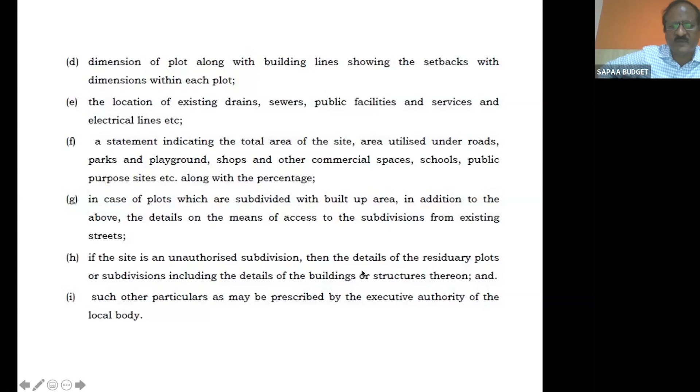And then another important thing is inspection. Inspection is, they will normally come for the foundation stage, after the foundation stage, you should call for inspection. They will come and see that there should not be any violation in the setbacks. When you leave the setbacks in the approval plan, there should not be any violations. If they come and see a violation, then you will not be allowed to proceed further.

So after completion of the plinth stage, they'll come. Then after the completion of the first floor, second floor, or after completion of the building, they'll come. But this is not for G+3 units. If you have only 3 units, or for an individual house, they will not come. But if it's more, where the completion certificate is required, inspection is a must. They'll have to come and see this thing.

That's why tomorrow when the building is stopped by the authority, the client will blame you. The client will tell you, sir, you have not guided me right. He will simply say that's what the CMDA member secretary also says. The client says, sir, I trusted the architect, I gave the full responsibility to him. I don't know the rules and the regulations. He has only advised me.

So if anything goes wrong, they will simply wash their hands off. We will be at the mercy of the law authorities. So you should not only be an expert in the rules, you should also tell the client or the contractor.

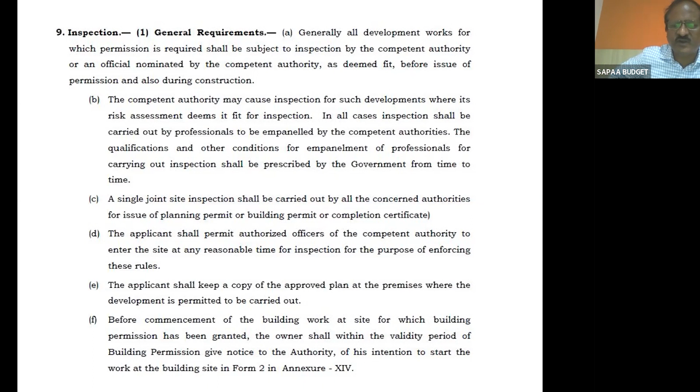But all these things will lead to problems. You have to put your foot down and say firmly, no, I cannot sign this, you cannot go as per approved actually. The architects have to be really careful about this during the progress of construction.

This is the plinth story stage. They will come, and at the last story they will come for the inspection.

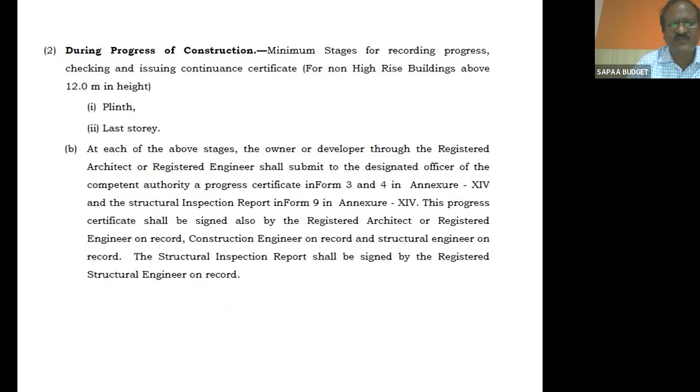That's it. Now demolition. If there's any building existing on the site, then you'll have to make a demolition plan. Sometimes the old building will be demolished and the new building will be constructed. The old building has to be demolished. You have to make a demolition plan, approve it, make an application to the corporation, and pay the demolition fees.

The corporation will take an undertaking from the architect, from the owner, saying that during demolition they have to be careful. They should not disturb the other buildings. They'll take an undertaking because during demolition, the building might fall on the neighbor's house. While digging in the old building, the neighbor's house might get damaged.

So they will take an undertaking from the architect or the owner, saying that there will be minimum disturbance for the neighbor building. If anything happens to the neighbor buildings, he will alter it at his own cost. Only after giving the undertaking deed can you apply. You can put the demolition plan plus the approval plan in the same drawing. Demolition drawing plus approval drawing also. You can get it done. All these things can be done by you.

But demolition means what is the extent of the area, like how many floors the building has, what building it is, RCC roof or Madras terrace roof. For all these things we have to attach the photographs. And then here, the latest advantage is the trust and verify method.

Now, our MS CMDA, with a lot of experience, said that we will trust the architects. We will trust. The moment you apply for planning permission, we will give approval. That's what the MS, Mr. Anshul Mishra IAS, told recently. Trust and verify method. We trust the architects.

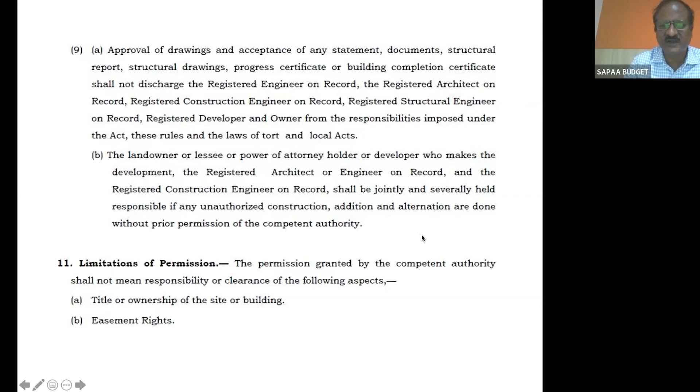But tomorrow when they come for a surprise inspection, if there's anything wrong in what you certified, then you'll be held responsible. So the biggest responsibility is entrusted on the young architects, and we have to do justice to that. Whatever is not there, even if the client tells you to sign, don't sign. Tomorrow you will get into problems. This is the most important thing I'd like to mention at this particular point. And all the rules are quite familiar.

An architect should know the construction permit. Your building permit, when you get it, is valid for 5 years. Up to 5 years the building permission is valid. If it's getting lapsed, then you can extend for another 3 years by paying some extra money.

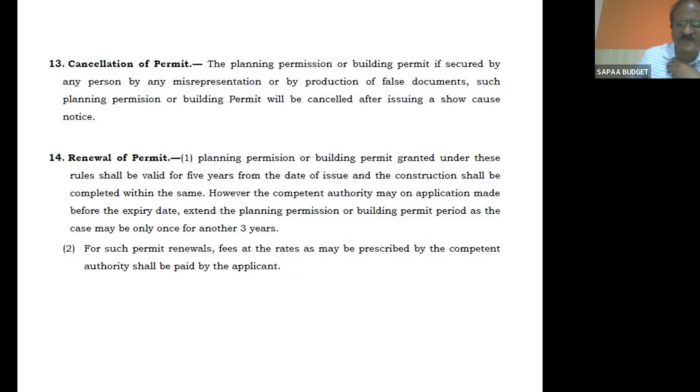Okay. Yeah, in these development regulations you can read all these things like deconstruction rate, spaces excluded from FSI coverage. This is one on the conservation of buildings. See, coastal zone regulation, CRZ areas. So you read this: here, in the CRZ regulation, they will not have mentioned all the rules. They simply say developments in this area shall be regulated with reference to the CRZ classifications and regulations notified by the Government of India under Section 3 of the Environment Protection Act.

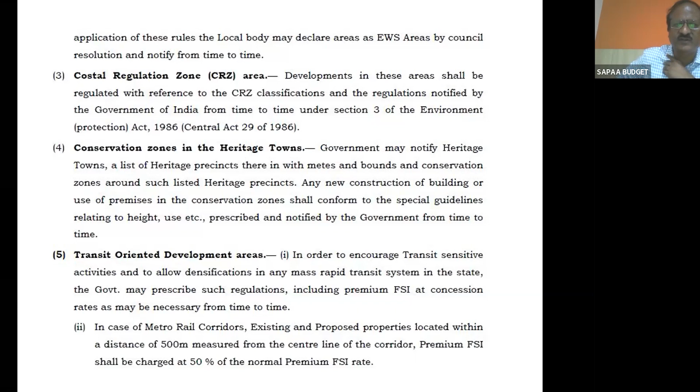You please go to Section 3 of the Environment Protection Act 1986, Central Act 29, and then read the whole thing. Take a Xerox copy so that you will know what are the building rules and regulations which are permitted in the CRZ zone. Similarly, conservation, transit oriented zone. Yeah. Boundaries and natural hazard prone areas. Next. Yeah, shelter charges is one of the most important things which you have to understand.

So if you're building group housing, or if the area is more than 4,000 square meters, 4,000 square meters means nearly 40,000 square feet, then 10% of the floor area has to be accommodated for the EWS, the economically weaker section. This will normally hold good for the promoters only. If you're building more than 40,000 square feet, then 4,000 square feet has to be allotted for the economically weaker section of people, where their unit area should not be more than 400 square feet, 40 square meters.

If that is not possible, then you can pay 1% of the guideline value of that area exceeding 4,000 square meters. Up to 4,000 square meters, there's no need to pay. Suppose you're building 6,000 square meters FSI. Then for the remaining 2,000 square meters, you'll have to pay the guideline value to the government. That's what is called shelter charges.

Or alternatively, you can give a site. If that is also not possible, within 2 kilometers you can give an alternative site to the government to construct that low-income group housing. So either you build the EWS housing in the apartment itself, for the 10%, or you pay the money, or you give alternative land. That is what is called the shelter charges.

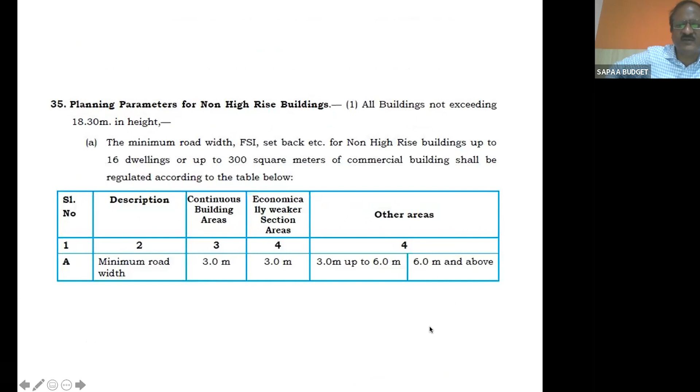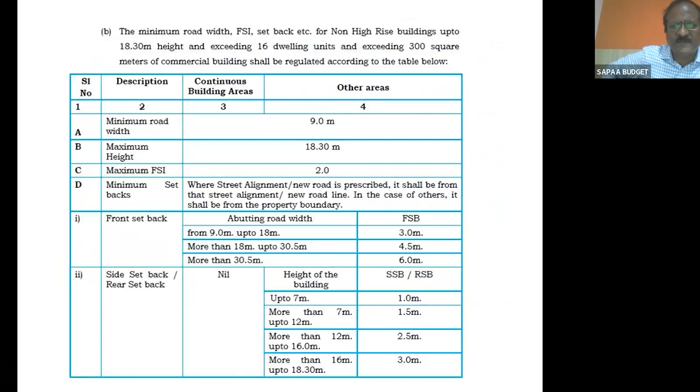Next, this will come only for the planning parameters. Yeah, and the planning parameters, like the minimum road width. You can also read all these things. It's quite easy only. See the number of dwelling units. Like that, a lot of things are there. You can just go through all this. The simple things to remember are,

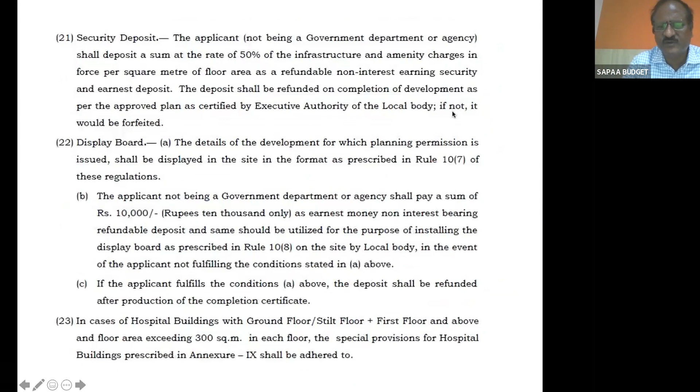if you have a toilet, the ventilation area for the toilet has to be minimum 5 square feet. If you're giving an open to sky from where your kitchen or any study room gets ventilation, then the open shaft size should be minimum 1.5 meters by 2.5 meters. This is not for the toilet ducts. Toilet ducts can be smaller, but any OTS through which your bedroom or your kitchen gets ventilation, the minimum size has to be 1.5 meters by 2.5 meters. Toilet size minimum has to be 6 feet by 4 feet.

So these are some of them. The riser should be minimum 15 centimeters. The tread should be minimum 25 centimeters. In public buildings, it has to be 300 mm. So like that, a lot of the standards are given for the essential building. The corridor width can be minimum 0.9 meters.

For schools and all, it's entirely different. For a school, for every 6 classrooms you should have one staircase. For every 22.5 meters, there should be a private staircase. Each classroom should have a double door. I think we will not go into schools and industries, it's a different aspect. But you should know the standards which are prescribed.

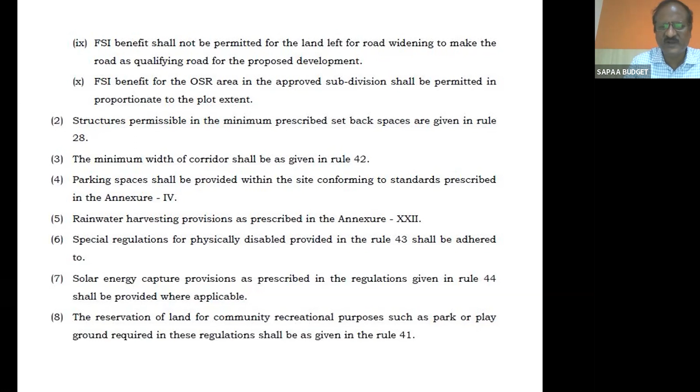So all these things, you can read and make sure of. But definitely, it's not possible to know all the rules by heart. Take the rules book, keep on reading them, and whenever any project comes, you can refer to the books and come back to the client.

Here, if you're building an apartment, a minimum 7.2 meters gap should be there for vehicle access. For a fire engine to move, you should have 7.2 meters all around the building. This applies even in the case of a mall or group housing developments, multi units. The fire tender movement is one of the most important things in all buildings. And high-rise buildings have got different rules altogether.

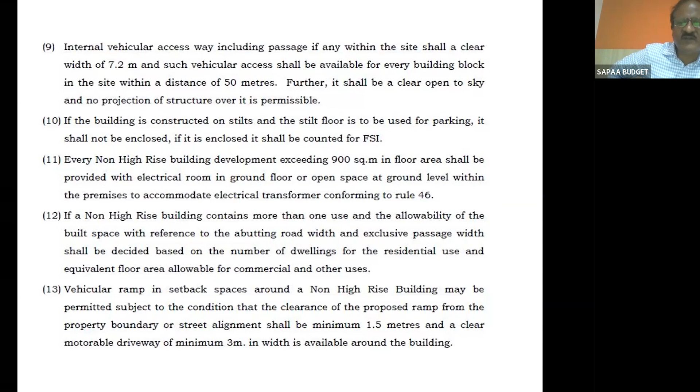Now coming to the single window system, like we were mentioning initially, and before that, can we come to the OSR? OSR is an important thing which I'd like to say here. OSR, Open Space Reservation. If the land is less than 3,000 square meters, then there is no need to give any OSR.

If the land is between 3,000 to 10,000 square meters, where you're building a group housing or a school or a college or a hospital or a commercial development, leaving the first 3,000 square meters, for the remaining 7,000 square meters you have to leave 10% as OSR. Open space reservation, you'll have to hand it over to the government, to the local body or to the panchayat. Then they will take care of it. They can make it a park or a playground, to have open spaces inside the city.

So from 3,000 to 10,000 square meters, 10% of the land has to be handed over to the government. If you're not able to do that, then that amount of money, 10% on the guideline value, can be given. Recently, in the Times of India, some person has objected that this should not be the case. People give money and then they build more buildings, and the whole city is becoming a concrete jungle. We should not allow that.

The main purpose of OSR is to have a lot of green areas. When we are densely building, when the city is getting rapidly urbanized, we should have a lot of green areas for the citizens' well-being. But if you take money from the builders instead of leaving the open space, then it's not going to serve the purpose. It's again going to become a concrete jungle. The article came up 2 or 3 days back in the Times of India.

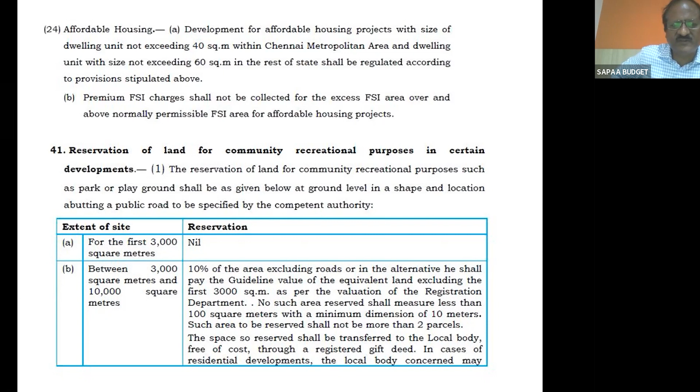So if it is more than 10,000 square meters, you have to leave 10%. There's no other way. You cannot pay the money to the government at the guideline value. Come to the next point, C. C is, if it's above 10,000 square meters, 10% area has to be given to the government.

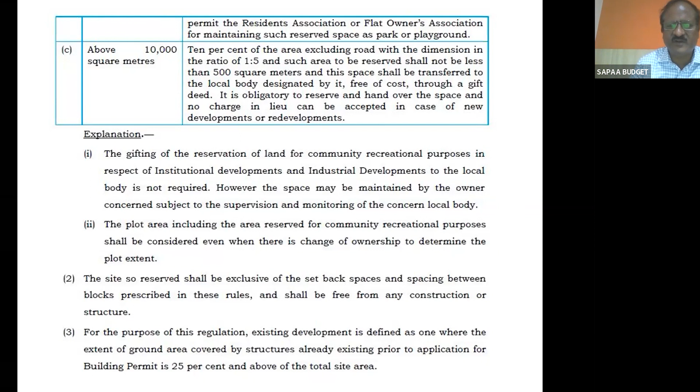You cannot. So this is called open space reservation, and the OSR has to abut the main road. This is also one of the most important things. OSR cannot be left inside; it has to abut the main road. For example, here they say if it's above 10,000 square meters, the minimum OSR has to be 500 square meters. If it's less than 10,000 square meters, the minimum should be 100 square meters. You can read all these things.

You can do it once you know the meaning of things, and rainwater harvesting. See, this is what I'm telling. The corridor width for a residential building is 1 meter, an assembly building like a Kalyana Mandapam 2 meters, institutional building 2 meters, hospital is more, 2.4 meters. In a hospital you have to take the stretcher, you have to take the wheelchair, then turn. So 2.4 meters is a must. So all these things you have to be familiar with.

Tomorrow when you design the building, you cannot tell the authorities, sorry, sir, I'm not aware of the rules and regulations, that is why I built like that. Even in the 2 meters, it has to be clear. The column cannot protrude onto the corridor. So that's why we have to educate the clients about all these things.

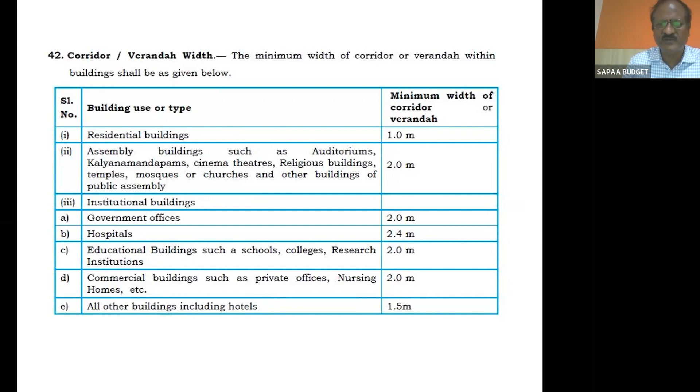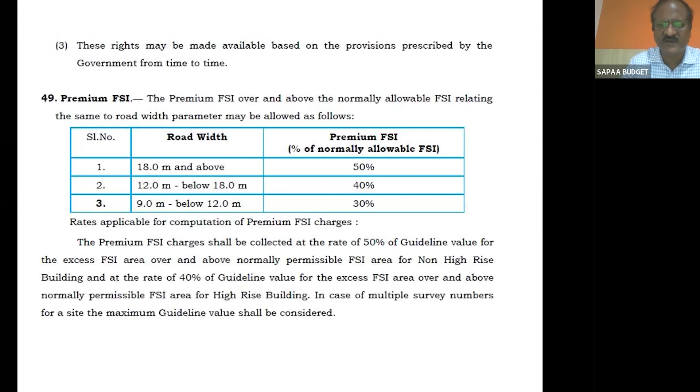Finally, I'd like to come to the single window system. The most important responsibility vested on us is the trust and verify method, recently introduced. Trust and verify means they trust us, so whatever you say will be agreed by the authorities. The single window system is not here, I just explained it to you. These are some of the examples we will keep at the end. Single window system means

you'll have to get the NOC from so many departments. Suppose you're building a school, you'll have to get an NOC from the fire department. The fire department is one of the musts. And if the school lies very close to the railway line, you have to get an NOC from the railway authority. What has happened now is they have given the responsibility to the architects to apply for the NOC from different departments.

There has been considerable delay. You cannot get an NOC from the railway; you have to run from pillar to post. You cannot get the NOC from the fire department; again you have to go from pillar to post. So what the CMDA has done now is, when you apply for planning permission, they are trying to link all the departments.

What are the departments? Department of Fire and Rescue Services, Police, Airports Authority, Indian Air Force, Chennai Metro Rail Limited, Public Works Department, Southern Railway, Archaeological Survey of India, National Monument Authority, Tamil Nadu Coastal Zone Management. So they have nearly 21 departments. So whatever building you do, certain NOCs you'll have to get from